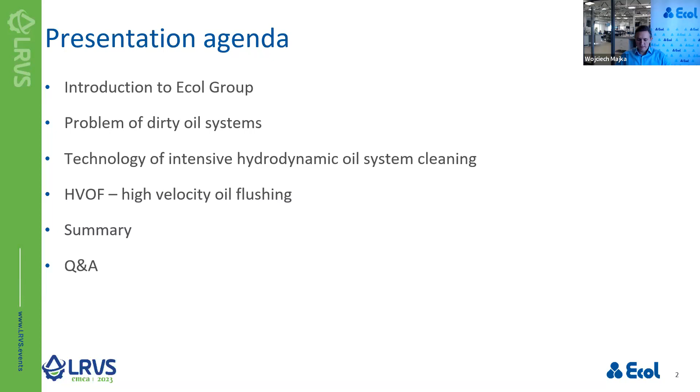That's the agenda. So our service portfolio, just to give you the picture who we are: the company providing outsourcing of maintenance in area of lubrication management, from the very beginning, from idea, techniques, supporting services, labor, everything.

So one of the parts of these activities used to be preparation of oil systems, especially for turbines, large equipment. So the cleaning and flushing of oil system became one of the key services that we are providing. In the meanwhile, of course, there are some other techniques for cleaning, some chemical services for turbines, for power generation equipment, oil analysis laboratory. Just behind me, there is a lab where I'm now doing oil analysis in diagnostic programs for the lubrication and tribology.

Short lubricant supply, so everything that deals with supplies regarding the maintenance plants in the lubrication area, and some other techniques for activities in industry.

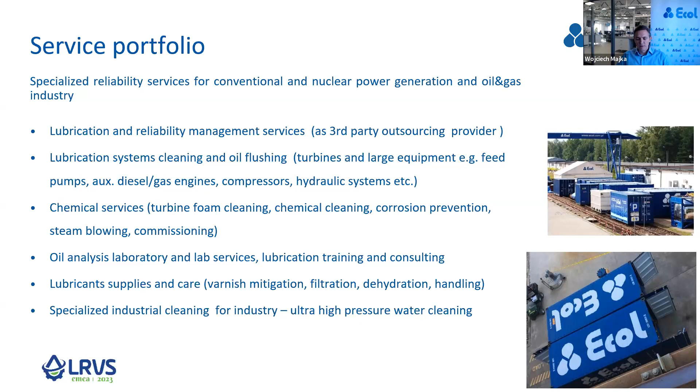We are based in Poland, where I am now. We have subsidiaries in Czech Republic, where Tomas is now, in Vlašim city near Prague, and the other part of us is located in North America, in Florida, which we do some services around that area.

In Americas technically, we are a process-driven company, so standards are not odd for us. We have ISO standards in place, including certification for the lab, which is accreditation technically. We are following the requirements of ICML 55.1 standard, meaning the lubricated asset management standards, and we are trying to provide reliability services to our customers, especially in the area of lubrication management and whatever is common with tribology.

The size of the company, we are 400 people on board, even more, I would say 420 probably now, in these 3 locations. We are providing around 500,000 lubrication and maintenance tasks every year, which is pretty substantial. The size of the lab does around 45,000 samples every year, and it's been done within last 30 years of our history.

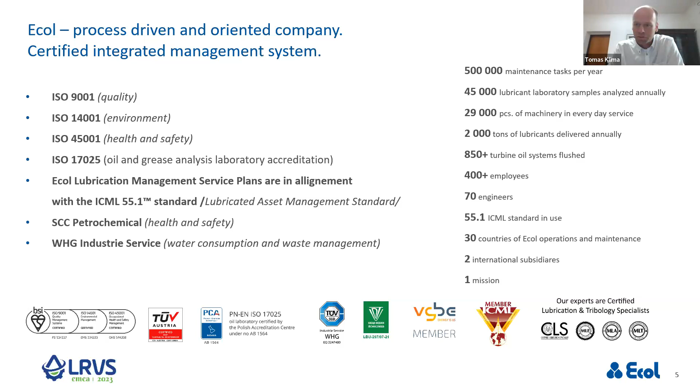Well, thank you, Wojciech, for the word. Thank you, the audience. Hello, everybody. I'm actually 18 years with you, Wojciech, which is a long time, where I definitely gained a lot of experiences, as well as others in Ecol, as well as you. And this is what we are doing so many years.

As you can see, within this time, we did clean and flush over 850 turbo units, different kind, different sizes, complexity, different environment, different industries. The largest we did is over 1,000 megawatt turbines from nuclear power plants, not only one, several of them in different countries.

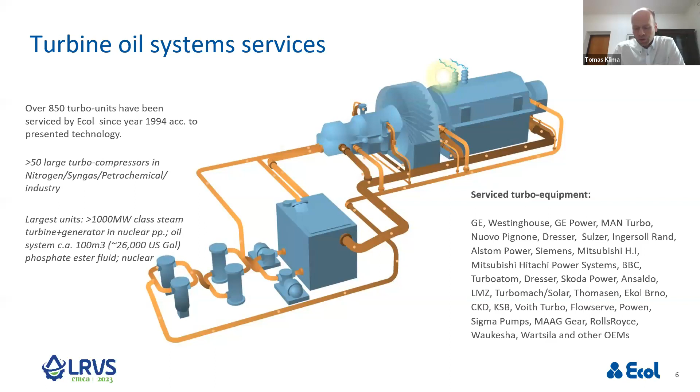And we are servicing different OEMs, directly or indirectly. And we started to be the service partner for them with the issue of contaminated oil system, which is actually contamination and cleanliness plays the key role in machinery operation, as impacting very much and very effectively the production of the plant, where however oil care...

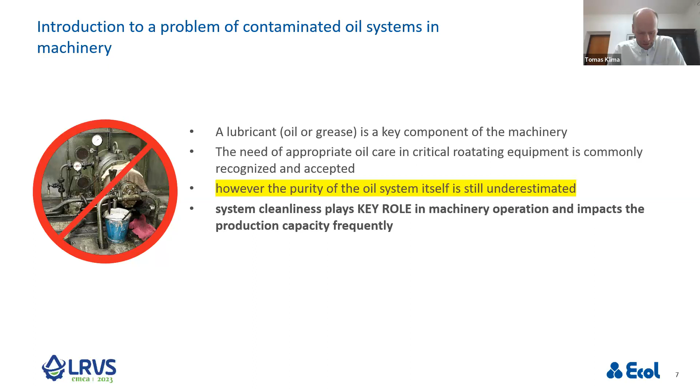seems to be recognized as very good maintenance service, condition monitoring very well developed nowadays. However, as we see from on site, from our customers and projects, that the purity of oil system itself is still underestimated. You can see that degradation comes to the system either from the environment directly, as dust, or indirectly...

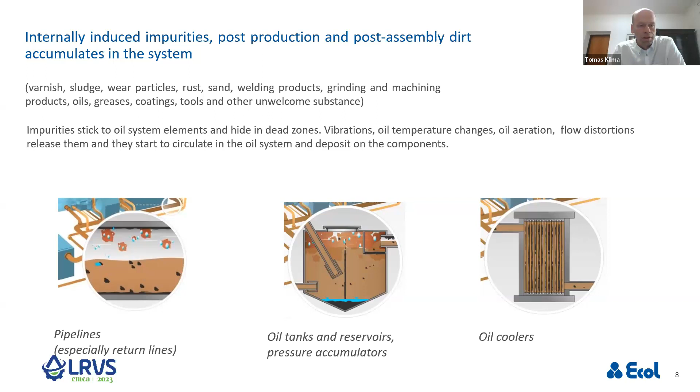during the maintenance, by assembling and disassembling the equipment that is in the oil system, of course also from degradation or corrosion process. Degradation here will be also mentioned, especially varnish and others. And everything is accumulating and settling down in the system, circulating and agglomerating. However...

the degradation is something, Wojciech, that is introducing... yeah, that's the key element of every operation of the lubricants, both just mineral or hydrocarbon based lubricants, but also the ester based fluids, which are pretty popular in some areas like control systems or lubrication systems for nuclear turbines, or maybe in some high power hydraulics in steelworks.

Anyway, both types of lubricants do age. Somehow they are changing the properties. They are generating lots of byproducts, which is aging products related to oxidation, thermal stress, some reactions also with the environment, with elements of the oil system.

Many times cross-contamination becomes a problem when somebody accidentally or maybe on purpose mixes lubricants. Everything of that creates potential for sludging, for creating varnish, for creating different kinds of deposits that most of the time accumulate over time. And if the user does not mitigate them somehow properly over the time, there's a moment where these deposits take control over the cleanliness of the system and become a real problem in operations.

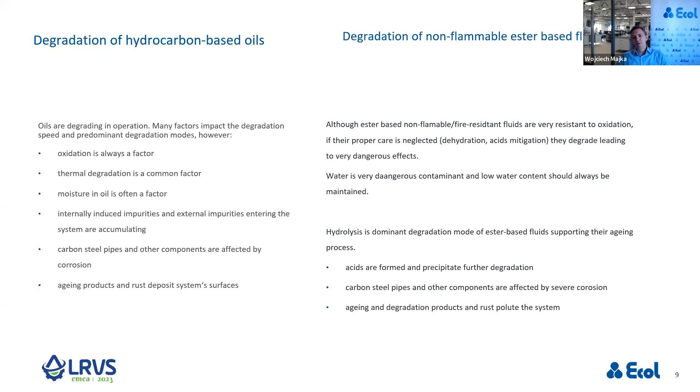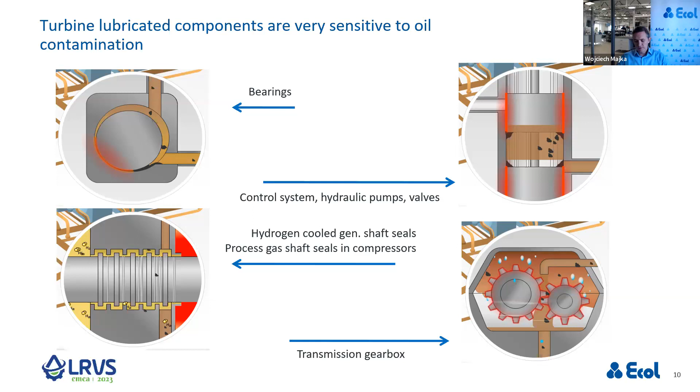Which areas are in danger? Of course, bearings - that's a very common situation with varnish and deposits. Also mechanical impurities, we have control systems, hydraulic pumps, valves, all the elements working with very precise fittings. Hydrogen-cooled generator seals, also in the compressors, are prone to have issues with cleanliness and deposit formations. And of course, transmission gearboxes are the subject of problems in this case.

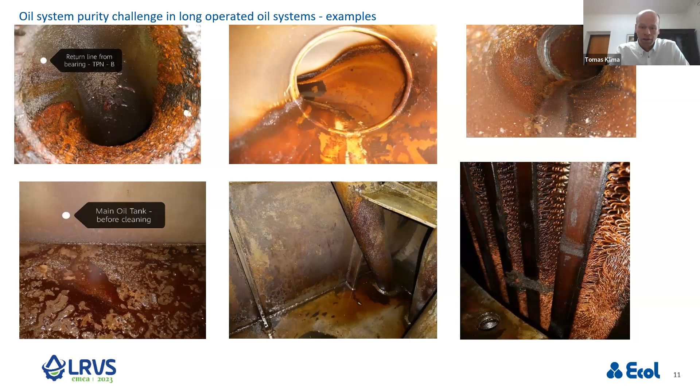Tomas, tell us something about the real case that we see. Following up the theory, we now see the reality we are witnessing at the customer on many projects. As you can see in the middle top, a typical varnish issue on stainless steel pipe, very well visible. The same on the right top, combined with corrosion on black steel. Other pictures show collected sludge in the oil tank and oil reservoirs. This is the reality we are witnessing at the customer.

There are other examples, such as oil coolers - very heavily deposited oil coolers, which definitely causes an operational problem for the customer. Sometimes the problems are not only temperature or cleanliness, but also result in seizure of components like bearings and pumps. As you can see in the middle bottom, debris is actually coming out from the bearing. So something definitely is happening here.

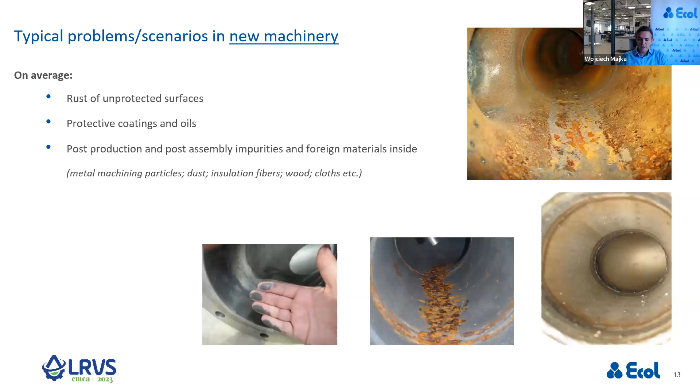It's also a problem for new systems. Although we're talking about operated systems, for new builds prior to commissioning we are facing a lot of deposits as well - rust, protective coatings, paint, and different post-production and post-assembly impurities. That is also the subject of thorough cleaning prior to the first commissioning. Sometimes the first commissioning, the first startup, is the only startup before another repair. That's why we take so much care of the cleanliness of the system itself, not only the oil, because a dirty system will be emitting deposits and debris in the future.

So what's the solution? Just a short overview. First approach: we can clean the system. Our cleaning technology that we provide and apply for very dirty systems is high pressure water cleaning - we call it hydroblasting - in order to remove deposits and any impurities, detaching them from the surface and removing them with water. Then there's another crucial step for fine filtration of the oil, which is very high flow rate oil flushing, to get turbulent flow and a turbulent environment in the pipes. And of course, when that's done, post-assembly filtration makes the system really fine and ready for operation without any troubles.

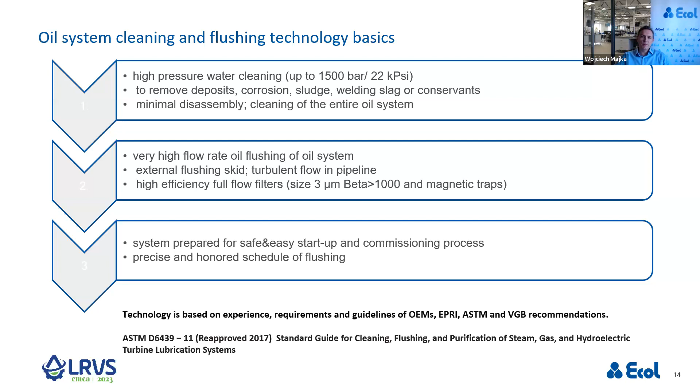You may see these different requirements and technologies supported or required by different OEMs and different standards, like VGB standards, and of course ASTM - the recent one, 6439 - which discusses different cleaning technologies, not only this one. We are presenting also other approaches useful for preparing the oil system.

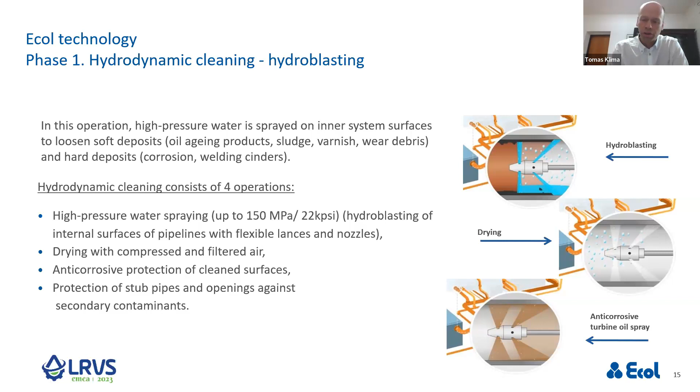Following the process, the first phase is to clean the system, getting rid of deposits, based on high pressure water cleaning or hydrojetting, as you like. The process is that hydro jets penetrate and remove all the deposits from the inner surfaces of pipes and other components. Following cleaning, there is a phase called drying, where we dry the system with compressed air to get rid of the water. After that, when we speak of non-stainless steel pipes, we need to protect it for the time until flushing comes. You can see it also in the pictures, how it looks on site.

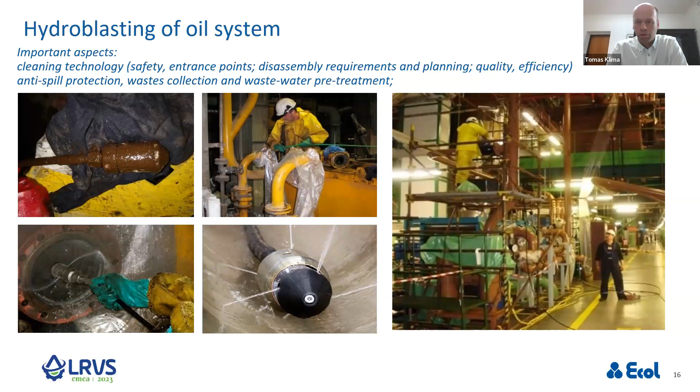You can see visibly the nozzles with the water jets. These water jets are penetrating all the deposits - hard deposits, soft deposits, varnish and others. You can see on the top in the middle, the worker introducing the nozzle into the pipes, and one by one the pipeline is cleaned with this technology. On the right hand, you can see the process from a distance, where there's the operator of the nozzle as well as a co-worker operating the pressure valve, helping him in the process. You also see some details of how the site is prepared and cleanliness is maintained.

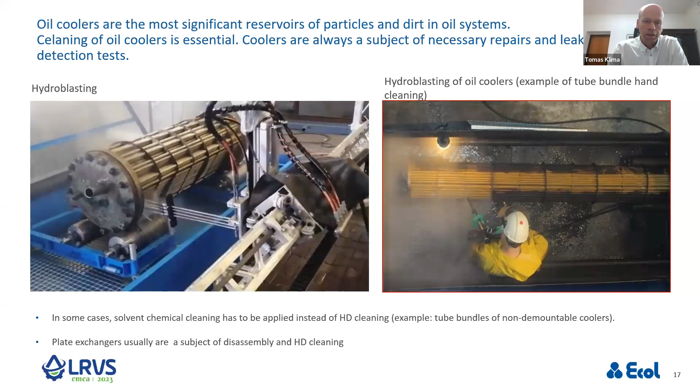Of course, the components of the oil system need to be cleaned as well. As you can see on the right, there is a special basin where we clean components like valves, short pipes, oil coolers, and other elements. Or we can do it in our workshop with automated cleaning, like you see with this cooler.

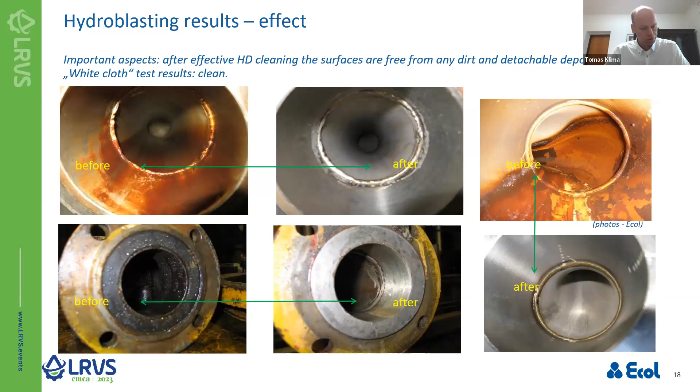It's very important that when we clean the system, we protect it afterward. So once it's dried and protected against corrosion, we need to get rid of any external impurities that could get inside after cleaning, which is also important to ensure the system can be assembled correctly. Foreign material exclusion procedures are in place, along with properly marking and protecting all the disassembled system parts.

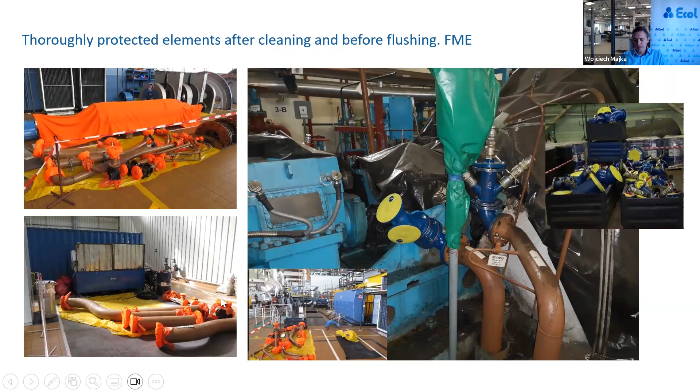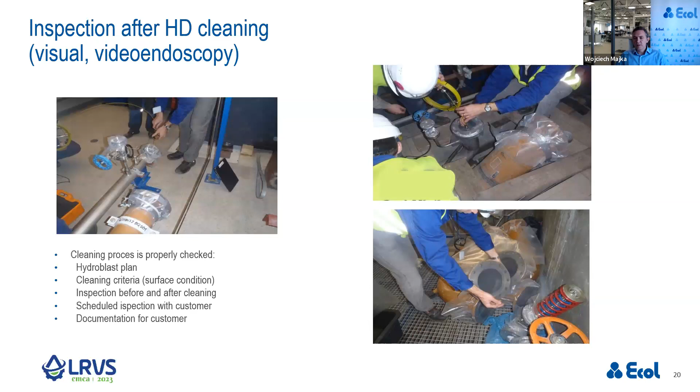There is quality support, which means endoscopy and evaluation of the cleanliness of the surfaces. There's a plan of hydroblasting and inspections, plus documentation for the customer and for the future, confirming everything was correctly prepared for flushing. And now the flushing comes in.

The system was already clean, but it has some loose contamination inside. So now we want to make sure that this contamination gets removed by the oil itself. So we are flushing the system.

There are common approaches, standard or conventional, which are not always the same—every OEM has little differences. However, the idea is to employ the system pumps to change the oil, put in the new one, and flush it with the system pump. This is not very sufficient though, because the pump is designed for delivering oil into the bearing at a certain pressure and amount, which produces only a laminar flow, not effective enough in the long term.

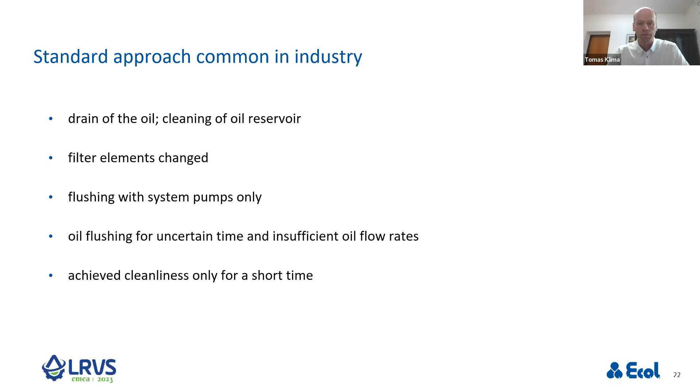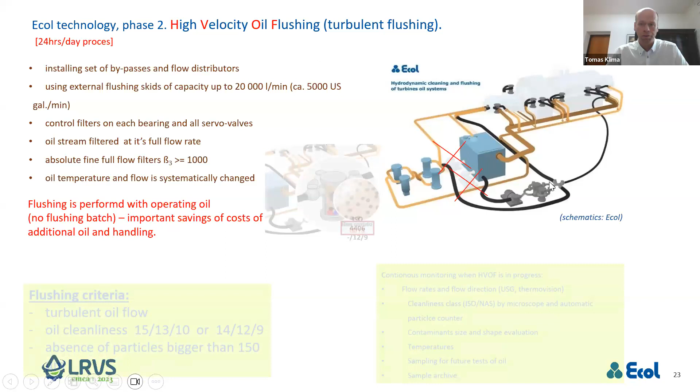On the other hand, we employ a technology which is phase two of our process: high velocity oil flush, or turbulent flushing, based on a high velocity oil pump creating large velocities of the oil, specially designed full flow filters that are a key element in reaching high cleanliness during flushing, and a set of bypasses installed on components like bearings, servo valves, pumps, and others.

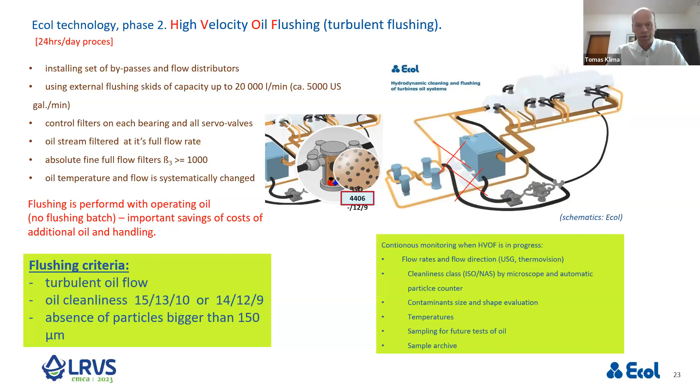There is also a specific component we use to maintain control over the process: specially designed control filters with a very strong magnet. You will see some pictures of it later. The technology also combines these control filters, and all jumpers are equipped with valves in order to handle the flow through specific pipelines.

So it's not everything open with just a turbulent stream into the system, but we are changing from one pipe to another according to engineering study and preparation, where schematics are prepared for the team realizing the work, as well as for the customer, to give them understanding of how we will do the flushing, and they will confirm it. So you see on the schematics our pumps, our filters, our jumpers, and control filters on the bearings, and so on.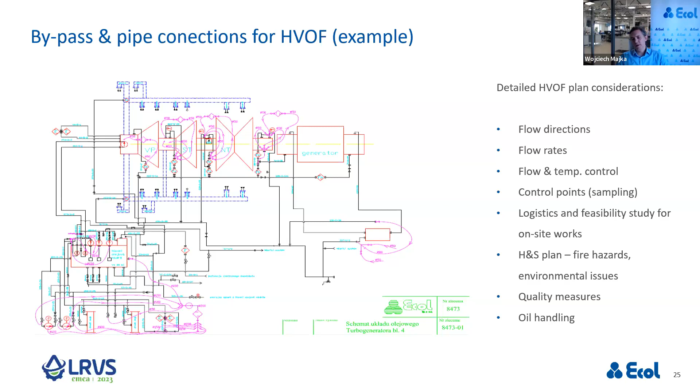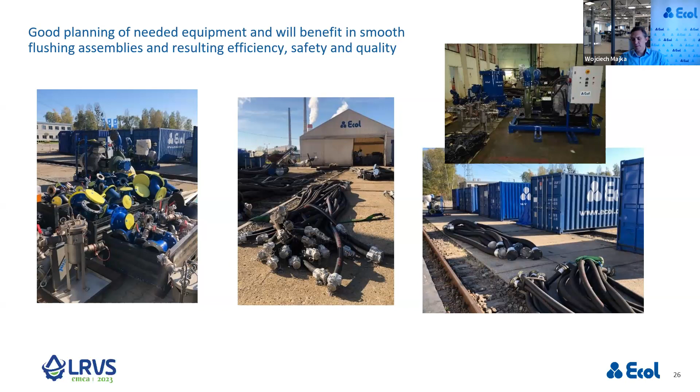Other things are also taken into account, but this is for Wojciech to explain. This is about planning and scheduling every task from the safety, quality, and feasibility study perspective. It takes a lot of logistics—hoses, manifolds, valves, pumps, temporary tanks—all of which is required and designed for the application.

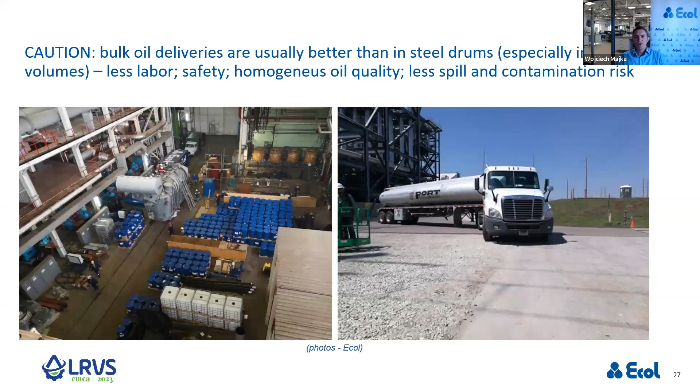It's also about supplying lubricants for flushing, whether in barrels or drums, or as bulk supplies in cisterns. Everything has to be done properly because our cleaning and flushing activities take some time, and we want to be as consistent and reliable as possible in these operations, especially when handling something flammable like oil fluids, which is also dangerous for the environment and for safety.

So you can see a lot of hoses and confined space filled up with this equipment. It's temporary, but it's also quite challenging, since the general overhaul of the machine is ongoing as well.

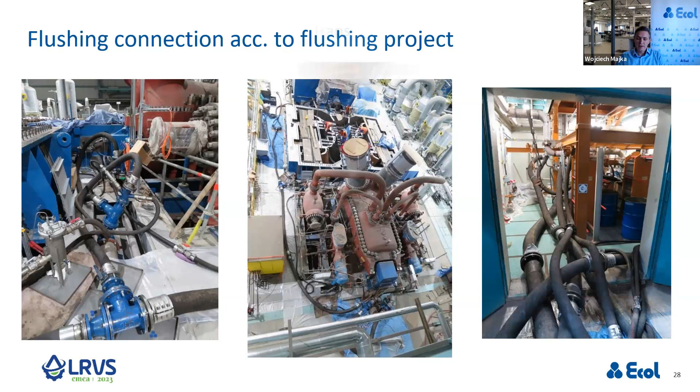So that's why we need to know how to fit this specific situation. Quality control of the flushing is key. We want to know how quickly we are improving with the cleanliness, what kind of impurities are still in the system, and what's the change of them. That's why we are using the control filters that Tomas mentioned.

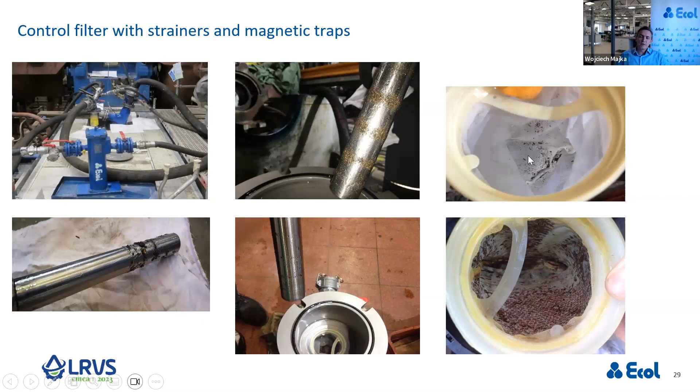We are using them with kind of magnetic rods, magnetic traps, which are showing us if any metallic debris is there or not, and kind of plastic strainers that we can also use to control what kind of impurities and what rate they change over the time of flushing. Of course, classic methods like evaluation of the cleanliness, which is particle monitors or particle counters, are also in use to make everything as objective as we can.

So we are using, from our perspective, mostly blockage cleanliness monitors, because laser based monitors for flushing are very sensitive to bubbles, which we have a lot of in the oil. That's why we rather use microscope methods or these blockage systems.

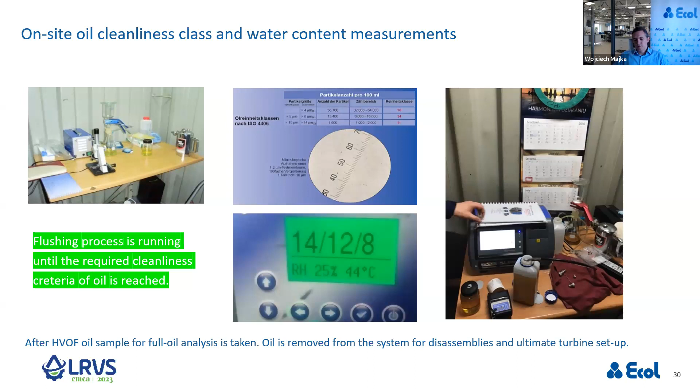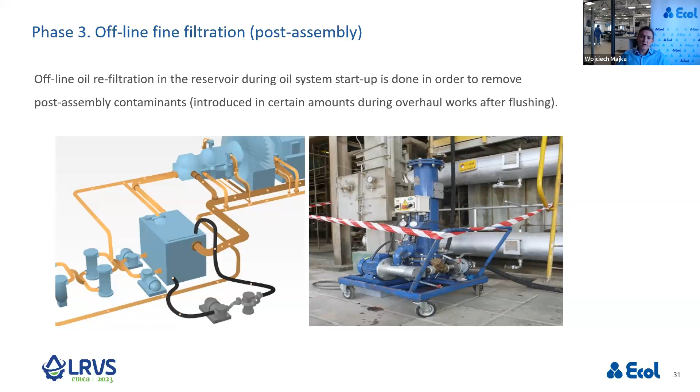So at the end, when we do the flush, we end it, the turbine or the machinery gets assembled together to the original configuration and is ready for operation. Then when everything is assembled, we just do the final stage, which is offline refiltration, meaning polishing the oil quality to the accepted level where we can really say green light or go for the operation. So technically that is how the whole process looks like.

Thank you, Wojciech. Everything was said probably. Let me summarize that. I would definitely like to say that this technology is proven, with visible effect, visible for the customer, completely

developed and on many projects experienced and confirmed. The hydroblasting itself very much shortens the future flushing process, which is for us also the guarantee that we can give to the customer on the timeline. We can guarantee the timeline if we do the hydroblasting first prior to the flushing, and this means also start

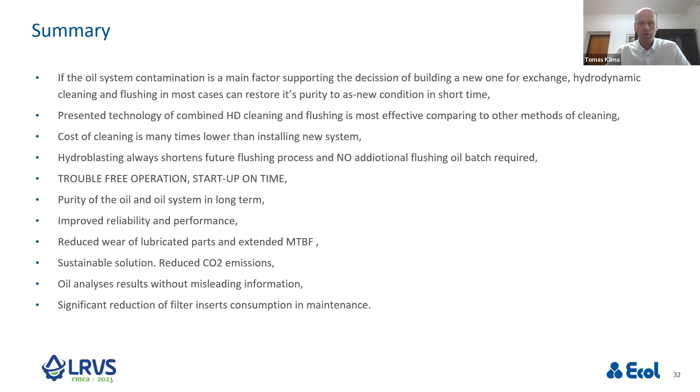up on time. And this also makes the system very clean prior to using the lubricants, so we are sure that there is no impact of any deposits or any previous lubricants on the new lubricant. That is also a saving for the customer.

And in this case, we also do not use any flushing batches of oil, which is a substantial saving. This is really eco-friendly, reducing waste, reducing time, energy, and other parts of this being a sustainable approach.

It's also saving on problems with interpretation of oil analysis reports, because since we have a zero or baseline condition of the clean system, we can have better diagnostics and trend monitoring in the future.

So we really believe that in some cases, not all of them, but some cases require such deep cleaning. And sometimes, which is also important, you do not have to change your system. You just can restore it by thorough cleaning and maybe some small upgrade and continue with the operation, which is really significant nowadays. So thank you for your part, Tomas.

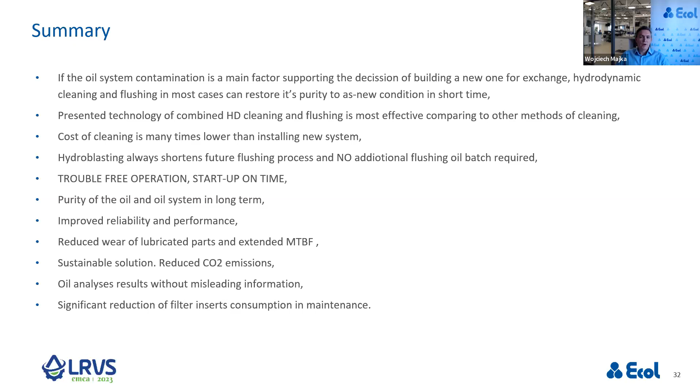We already have 3 questions popping up. Are you able to see them from your screen? The Q&A. Yeah, I opened the Q&A. Tomas, can you see it? Because I'm not sure if I see it.

Does high velocity oil flush demand an intermediate fluid to remove debris, or can new oil be inserted directly after a high velocity oil flush? Actually, after the hydroblasting process, the first cleaning process, we can already use the final oil that will be in operation without any harm, without any change of quality and chemical parameters. So we are sure that no residues that can chemically affect the new oil are remaining.

I'll take the next question. What is the Reynolds coefficient you choose for your high velocity oil flush operations? Basically, we're trying to have it more than 4,000. That usually should be enough.

Of course, in very large diameters, sometimes return lines are very big, like even almost 1 meter in diameter, so in these cases it's very difficult to achieve very high flow rates. That is why we so thoroughly clean the system to make sure there are no impurities. But our principle is to make sure 4,000 and above, while also changing the flow directions sometimes, so we can control flow and also disturb these flows. So it's not only continuous flow at some Reynolds number, but also distortions in the flows.

Thank you for a great presentation. One question that popped up is, how do you deal with the wastewater and solids that are cleaned out? Secondly, what's the normal timeline for a cleaning operation?

Wastewater in a situation when we are cleaning hydrocarbon oils, so mineral or even synthetic PAOs, it's not an issue because it can be easily separated. We use water separators that can get rid of the oily part from the water, and the water can go to the industrial sewage that you have in any plant. So we make sure that the wastewater meets the requirements of the plant's sewage system. If not, we can take it and dispose of it into a wastewater treatment plant if required. So it's not going to the environment - we condense the oily part and dispose of it according to requirements.

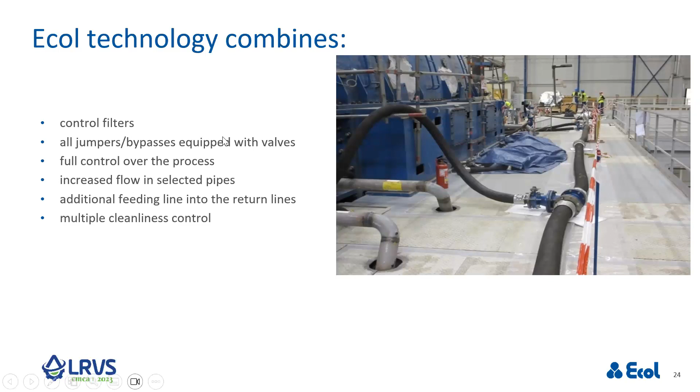It will be a pleasure to get in contact with you. Thank you, thank you very much. Thank you, Tomas, for joining us. Thank you, Wojciech, today. Okay, thank you. Bye. Goodbye.